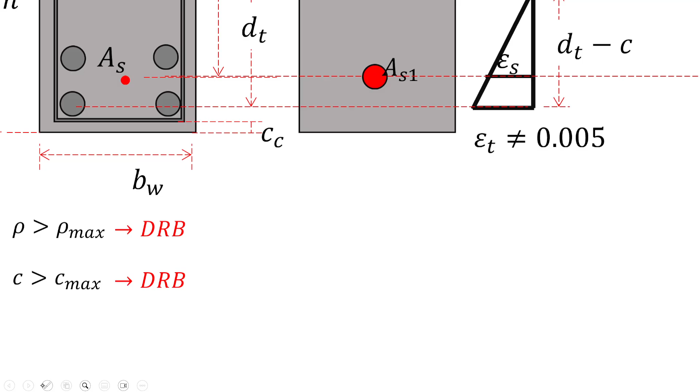So how do we get this C? You assume first that it is singly reinforced. These are the only forces you will use. In the analysis of a singly reinforced beam, you always start with compression equal to tension.

So you always start with compression equal to tension. Your compression force is 0.85 fc' a b, and for the tension you have AS, FS, because you don't know if it is yielding or not for the analysis. So just look at these stresses, AS FS. You assume it still yields, solve for A, then after that solve for C. If C exceeds C max, then that's the case where you should analyze it as DRB.

Include the compression bars in your analysis, include these couple forces. Instead of just using the previous forces, you now include these on the equilibrium equation of C equals T.

So what's the difference between the design and the analysis of doubly reinforced beams? For the design, we use the strain of 0.005. The value of C is always C max, and the value of A is always beta times C, where C is C max.

For the analysis, we're not sure if the designer designed it as tension controlled. Maybe after designing, they still increased the number of tension bars so that it will now be in the transition zone. They increased the steel area, so it becomes transition. So we're not sure if it is yielding or not.

This is the stress on the tension side. We also do not know if this steel has yielded. So we're going to assume the values of these stresses later in the analysis.

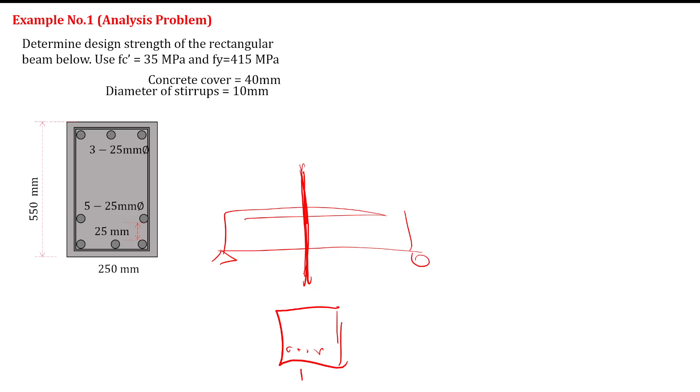You can easily identify which part of the rebars is on tension or compression just by identifying the number of bars. Obviously, you always provide more rebars on the tension side, and fewer rebars on the compression side - always more rebars on the tension side based on the stress strain diagram. Because here, AS1 and AS2 are combined, while here it's just AS prime. So your total AS is the addition of AS1 and AS2. This means the tension side is at the bottom, and the compression side is at the top.

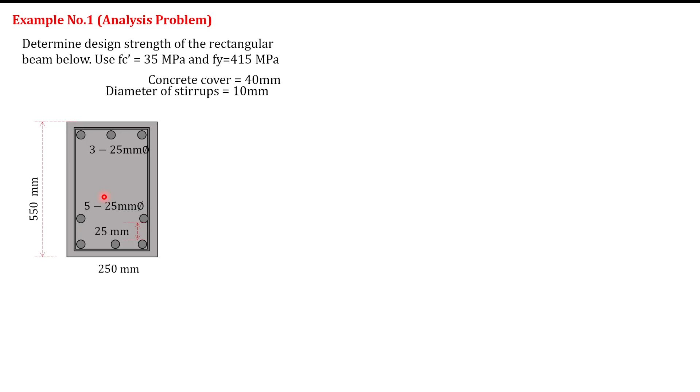But before we consider this compression reinforcement, you have to make sure first that this cross-section or section of reinforced concrete is doubly reinforced.

Okay, so check if SRB or DRB. That's the first thing to do. To check that, we have to identify first the DT, because that is required for the formula of checking later on. We'll be using the formula: dt is 550 minus concrete cover minus the diameter of the stirrups minus the diameter of the tension bar over 2. So this is 484 millimeter.

So we also solve the effective depth. Effective depth is the centroid of your rebars, the rebar group in tension side. Since hindi equal yung bakal natin, so we have to identify this D1.

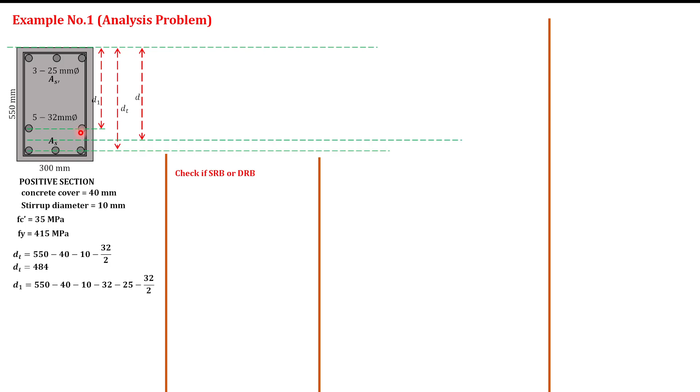So magva-Varignon tayo. Overall depth is 550 minus the concrete cover, stirrups, diameter ng bar, okay, and then this distance between the two layers of bars, if not mentioned, always use minimum clear distance of 25 millimeters, okay, and then 32 over 2. So that is to measure the distance of this central point ng rebar na to, or midpoint, up to the compression side. So that is 427.

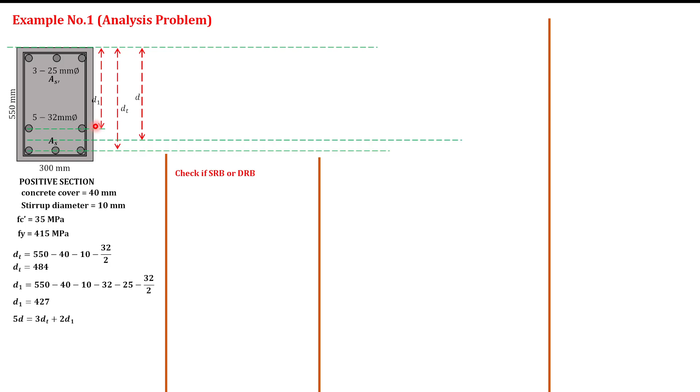Now let's use Varignon. So 5 rebars times the effective depth, 3 at dt, and 2 at d1. So what we can solve here is an effective depth of...

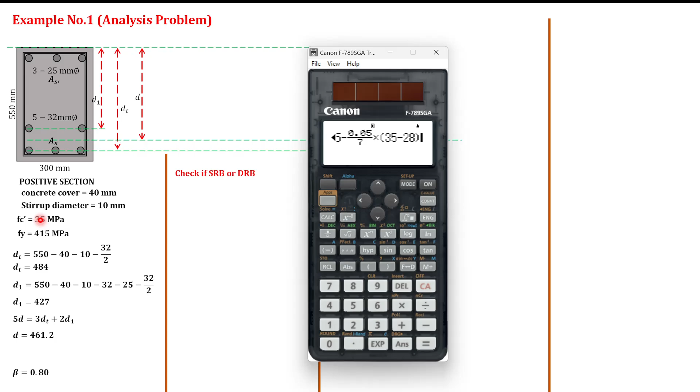461.2. Okay, let's now check. Anyway, the beta here is 0.8. From this formula of beta, remember, if the FC prime is greater than 28, this should be your formula: 0.85 minus 0.05 over 7 of the FC prime, 35 minus 28. So that we have 0.8 of your beta.

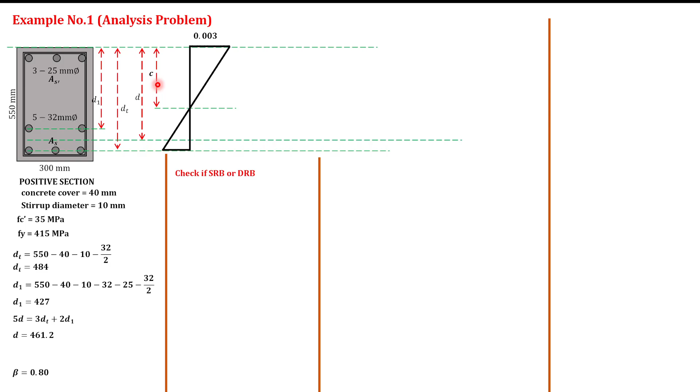Let's now draw the strain diagram. For the strain diagram, this is the uniform strain, or the strain at the extreme compression, 0.003. This is the depth distance of the neutral axis from the extreme compression side of the concrete. This is the ES, or the strain on the centroid of your reinforcement.

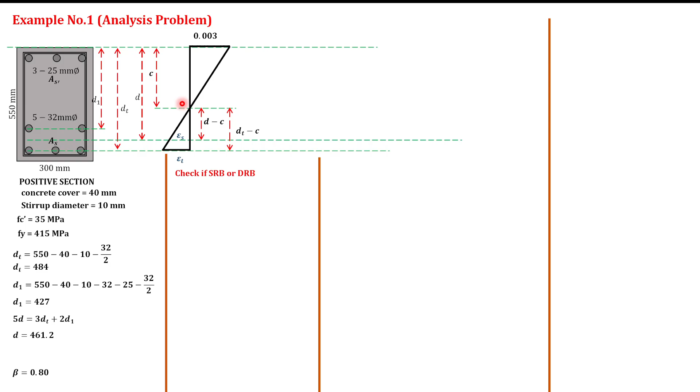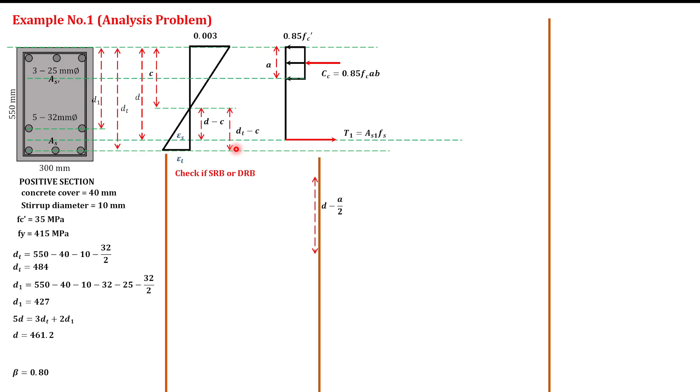This is D minus C, since this is the effective depth. And this is ET, which will be the basis later of the reduction factor. So this total distance is DT minus C. And then you have the stress diagram: this is the uniform stress, 0.85 FC prime, and this is the depth of compression block. This is the compression force due to the compression block, 0.85 FC prime AB. And then you have the AS, FS. Assuming na singly muna siya, ito muna yung laman ng stress diagram natin.

Okay, so we compute the steel ratio, AS over BD. Total area of tension bars, if it exceeds the maximum steel ratio in tension control limit. Okay, so we already derived yung formula na yun.

Mamaya pakita natin yung formula. So AS is 5 times 32 squared pi over 4, over B times the effective depth, not DT. So effective depth of 461.2. So this is the steel ratio, 0.029064.

How about the maximum steel ratio? So the maximum steel ratio is 3 over 8, 0.85 FC prime beta over FY, DT over D. Where did we derive that steel ratio? Recall lang natin, na-derive siya class, so i-minimize mo to 0.005. Tapos makukuha mo dito, C max. Tapos yung A mo, yung ito is beta C max.

Okay, tapos makuha mo dito is AS max. Tapos yung AS max na yan, i-divide mo ng BD. So that is your rho max. So you may use this approach para makuha yung raw max. If you do not know this formula, you can also get this value, that raw max. Okay, let's try: if you do not know this formula, you can also use the equilibrium equations to solve the AS max up to the raw max.

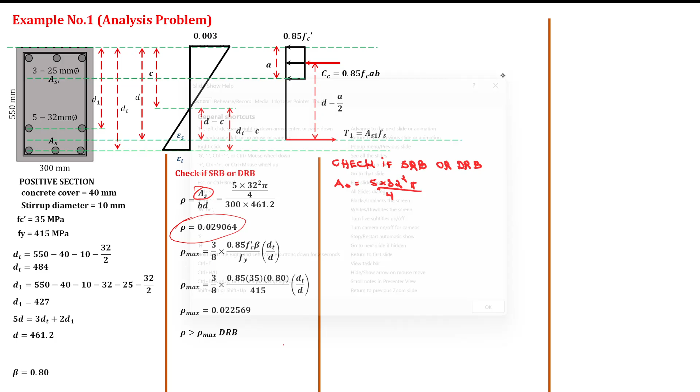So AS is 5 times 32 squared pi over 4. Okay, so we can have the value of AS, which is equal to... so we have 5 times 32.

So this is 1,000, 4,021.238. Okay, now I will solve here. I will set this strain to 0.005, meaning I will solve the value of the maximum area allowed para maging tension control. So if I have a strain of 0.005 here, this C will be C max. C max is 3 over 8 of dt, dt is 484. So 3 over 8 times 484, we have 181.5. So store this value at C, in millimeters.

Then I will solve the value of A. A is equal to 0.8 times C max, 0.8 is our beta. So 0.8 times 181.5 is 145.2 millimeters. So let's store this value at A.

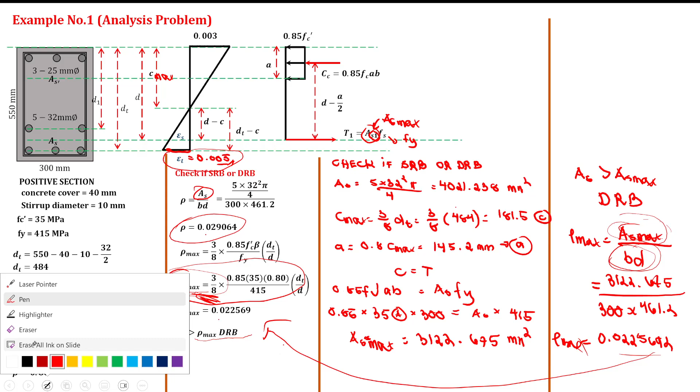3 over 8. Okay, so anyway, we already proved that the cross-section is doubly reinforced, okay, because the area of steel exceeds the AS max. Ibig sabihin ng class, that pinaghahatian niya ng dalawa, nahati yan sa AS max plus the AS2, which is may isa pang tension force dapat na may nag-act dito. Okay, so ano-ano yung tension force na yon?

First one is the compression force due to these compression bars. So that is located at the D prime. D prime is concrete cover plus the diameter of stirrups plus the diameter of this compression bars over 2. Okay, usually the compression bar's diameter is not similar to the tension bar diameter, so take note of that. So the D prime here is not the same with the D prime at the bottom or on the tension side. So take note, use the compression bars for getting the D prime.

So this is where your additional compression force is located, which is C compression force due to the steel is AS FS. Supposedly it should be only AS FS, but we have here 0.85 FC prime na minus. Supposedly dito siya i-minus, pero nilipat natin siya due to the difficulty nito, magiging difficulty natin once we get the centroid of this compression block. We already discussed this from the discussion of design. Kaya nandito yung less 0.85 FC prime kasi consider natin yung butas na compression block natin.

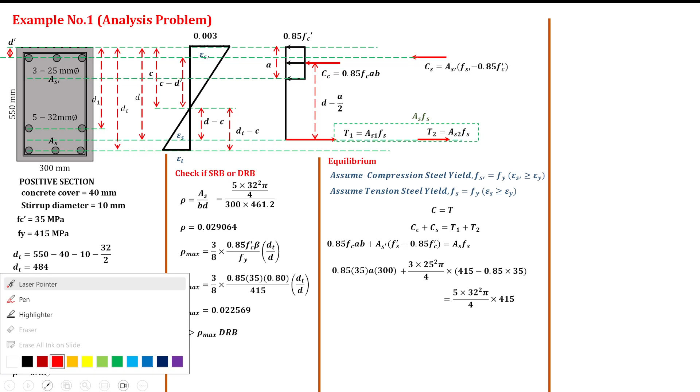Then we assume Fs, we assume that this is yielding. Okay, so actually kung tatakpan mo to, tanggalin mo to, similar yan sa approach natin, similar yan with the approach of singly reinforced beam analysis. So nadagdag lang itong additional compression force na to.

So solve mo yung A. Okay, this is the value of A, 123.416. So solve din natin yung strain, confirm natin if the strains are really greater than the yielding strain. But before you solve the strain, di ba kailangan mo na ng C? A is equal to beta C, so our beta is 0.8, Fc prime is 35, so therefore C is 154.27.

The yielding strain is Fy over E. Fy is 415, so the yielding strain is 0.002075. Let's compare, let's solve the Es prime. By ratio and proportion, Es prime over C minus d prime is proportional to 0.003 over C. So we can solve the Es prime, take note that is d prime, C minus d prime ito. So Es prime is 0.00175. As we can see, Es prime is less than the yielding strain.

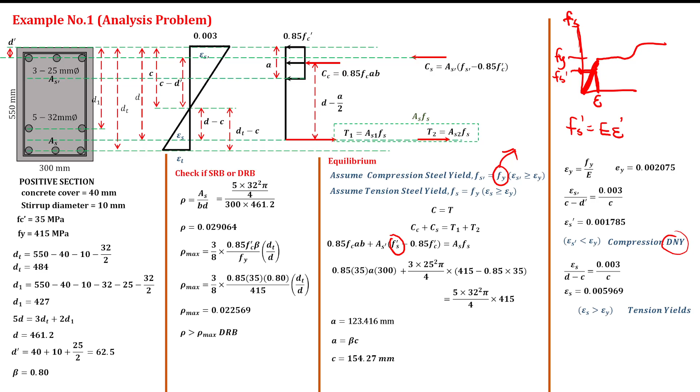Hindi siya mag-yield. Okay, from the stress-strain diagram, ito yung ating mga stresses, ito yung ating yielding. Pag hindi siya nag-yield, yung ating strain, we can now use the modulus of elasticity. So meaning to solve this Fs prime, we just need to multiply the modulus of elasticity to your strain. So ito dapat i-substitute mo dito. Instead of Fy, dahil di nag-yield, use the strain.

Okay, so actually does not yield to, no? Ito yield. May apat ka kasing pupuntahan dito na cases. Either yield, kapag tama tong case natin, yield siya. Does not yield, yield yung, ito we're pertaining to compression, ito naman tension bars. Yield, does not yield, kasi dalawa yung bakal natin. So ito yung mga possible na maging scenario: does not yield, does not yield.

Okay, so ano yung susunod mong magiging assumption kung mali itong assumption natin? Yung magiging susunod mong assumption is kung ano yung naging result dito sa ating checking. Okay, so dito sa checking natin, compression does not yield and tension yields. So that will be our next cycle of equilibrium: compression does not yield and tension yields. Okay, so mali na kasi yung value ng A natin tsaka value ng C.

So let's proceed with the next assumption. Compression still does not yield. So ito yung magiging value ng Fs prime natin. Saan siya galing? Saan galing itong formula na ito? Doon pa rin sa strain natin, and that strain now will be dependent with the modulus of elasticity.

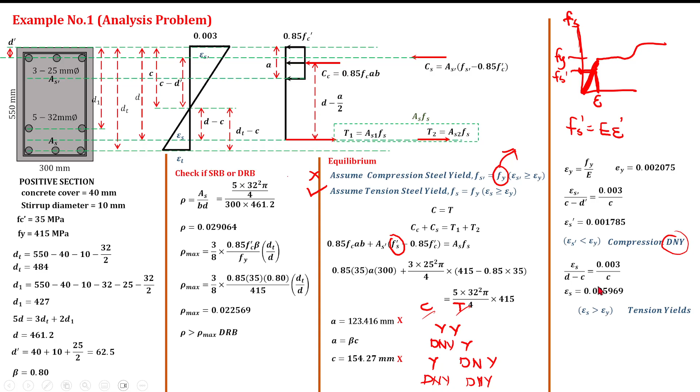Okay, so let's substitute. Let's rewrite again the equation, the equilibrium equation. C is equal to T. So C, compression force, we have two compression forces, and we have combined tension force na. Okay, so again, your Fs prime here should be taken as does not yield, pero yung Fs should be taken as yielding. So let's substitute.

Okay, so Fs prime will be based on the value of C. So our unknown here is C. And your Fs is yielding. Since we have here 0.85 Fc prime AB, instead of using A, we use beta C, so that our unknown is C. Okay, so let's substitute.

Medyo mahaba siya, class, no? Anyway, ang Fc prime pala dito is 35, sorry. 0.85 Fc prime, beta is 0.8, beta C times B na 300, AS prime, tatlong bakal na 25 mm, and then 600 times C minus D prime all over C, minus 0.85 Fc prime, is equal to AS Fy.

So the first variable na makukuha mo dito is the distance of the neutral axis to the extreme compression layer. Okay, so you store this value as C, and then you solve the value of A from A is equal to beta C. Now, this is not yet the final answer na A tsaka C unless you prove that this...

So checking the strain. Okay, strain dito, no? So we have my ratio and proportion, ES, D minus C, is proportion to 0.003 over C. So makukuha natin is 0.005 compared to the yielding strain, Fy over E, so that is 0.002. As we can see, greater than yung ating strain on the tension side versus the yielding strain. So meaning, tension still yields.

Since tension still yields, okay, tama yung assumption dito. Tama yung assumption dito, we can now adapt the value of C and the value of A. So both are correct assumptions. Tsaka mo lang masasabi na tama na yung C tsaka A. So what's next after equilibrium equation? Pwede na tayo mag-moment equation, pero hanapin muna natin yung magiging reduction factor natin.

Reduction factor will be based on the strain on the extreme tension layer, tension reinforcement. By ratio and proportion, so you have ET, dt minus C is proportion to 0.003 over C. Okay, so dt, no? So we have dt of 484. So let's substitute, 80, ET now is 0.005884. So how do we solve that? How do we identify the reduction factor?

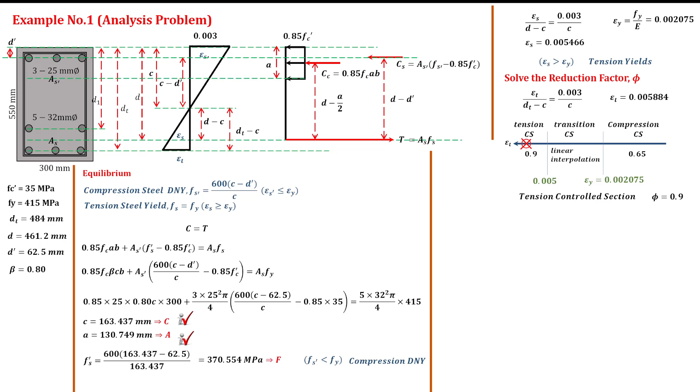We have different limits. This is the increasing strain. So if your strain exceeds 0.005, the section is under tension control section. If your ET is less than 0.005 but greater than 0.002, the yielding strain, you have transition. But if your strain is less than the yielding strain, that is in compression control section. So fortunately, our strain is greater than 0.005, so therefore this should be in tension control section. So what will be the reduction factor? 0.9. Okay, so with that, we can now proceed with the moment equation to solve the flexural moment capacity.

In solving the moment, do not use the tension force kasi we do not know the centroid ng dalawang force na to. So isosolve mo pa yung centroid ng dalawang force. So gawin na lang natin, ito na lang yung moment natin isa-isa. Okay, nominal moment lang yan ha, kapag force times distance. Force times distance, force times distance. Anyway, the distance between the compression bar to the tension force, D minus D prime yan. Si effective depth minus the D prime. So now let's solve.

Reduction factor natin 0.9, then the force times the distance, force times the distance. So we already have those values, no? Meron na tayong A. Meron na tayong AS prime naman is given. Na-solve na natin yung FS prime, does not yield siya, class. So ito gagamitin natin. Pag nag-yield yan, FY ang gagamitin. So does not yield, ito gagamitin natin, ha? So let's substitute. Medyo mahaba lang to sa calcu, no? So kaya isa-isain ko na lang.

So 0.9, 0.85 FC prime. A, stored at A. B, 300. D, effective depth, A over 2. Okay, then ipa-plus ko. Si 0.9, distribute ko na lang si 0.9. So you can solve this individually kasi hindi yata siya kasya sa calcu or mahaba siya itan. So isahin mo na lang kunin yung factored moment, yung design moment capacity nito, no? Yung dalawang force. Okay, ito rin naman, AS prime, so we have 3 bars, 25 mm diameter over 4, FS prime, minus 0.85 FC prime, D minus A over, D minus D prime. Okay, D minus D prime.

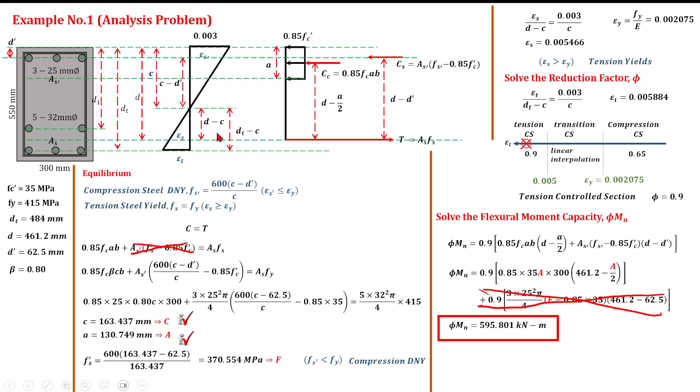This is the stress, no? So para hindi makalimutan yung mga formula dito, class, no? Just focus on the stress strain diagram. Okay, this will be the basis of your calculation. Okay, so next problem.